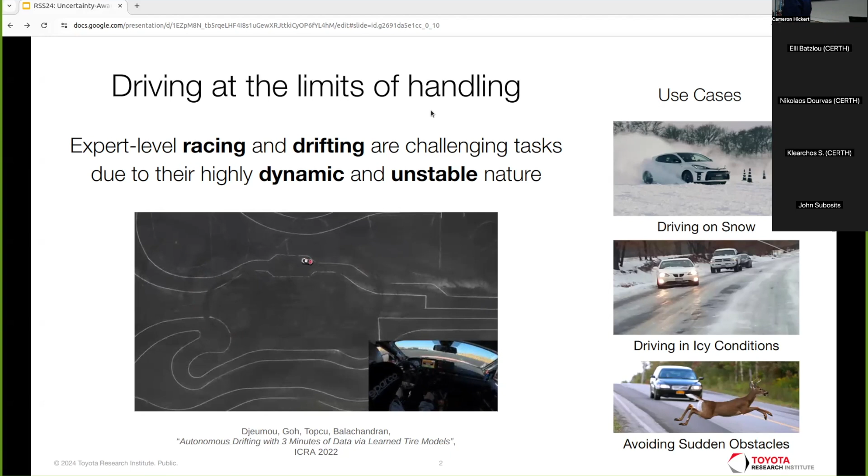All right. Often the way this is done in our group and others is through model predictive control. So in model predictive control, you have a mechanism for predicting how the control inputs you make now and in the future will impact the trajectory of your vehicle. Then, according to your objectives, which you encode as a cost function, you can optimize your inputs across this trajectory to get your desired behavior. So you can race around the track and avoid obstacles, or you can drift with such a framework.

Maybe one note for the latter part of the talk is depending on how you set up your optimization problem and parameterize your objective function, these controllers can actually serve a range of use cases. You can use them for anything from pure trajectory tracking all the way up to trajectory optimization and even motion planning in some settings.

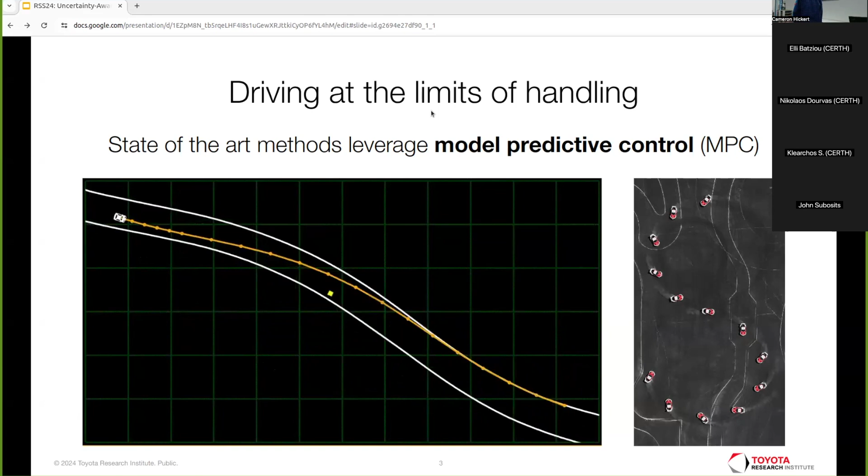And with tuning and refinement, these can actually work quite well. So this is some work that the group did a couple years ago demonstrating autonomous drifting on a racetrack for the first time. This will give you a slightly different perspective on drifting and help you understand where the current state of the art is.

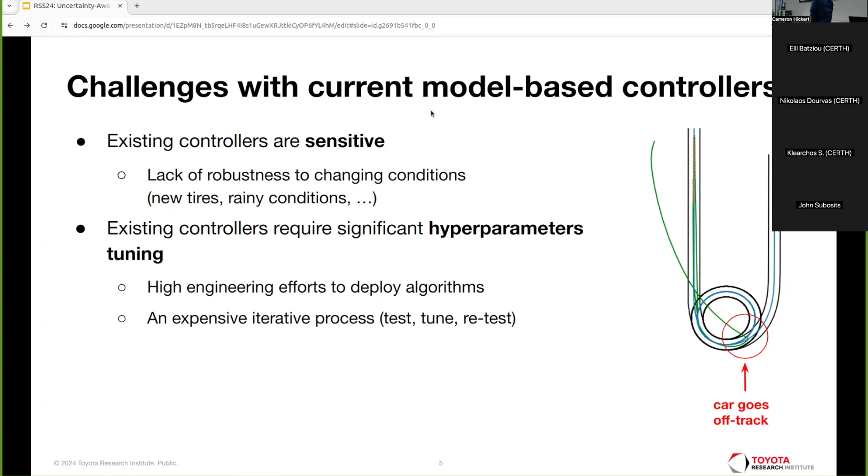All right, so that gave you some idea of what we could do with existing deterministic MPC and vehicle models that are hand-tuned and hand-engineered. So while it's capable of great performance, there are some trade-offs, right? To get these controllers to work reliably, you have to do a number of rounds of testing, tuning, and iteration. This can be a problem when the vehicle's behavior is actually changing. For example, if you're operating on new tires or on a new surface for the first time, you want the controllers you're deploying to be reliable.

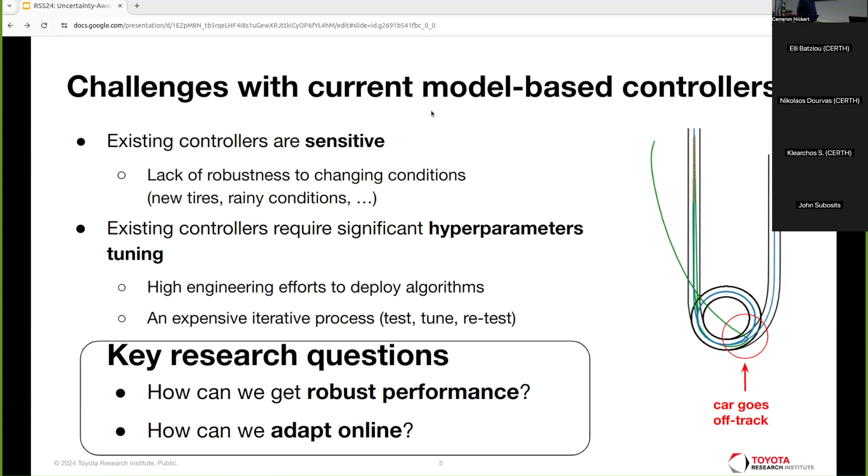So these have motivated the two research questions that we're currently exploring. How we can get controllers that perform robustly so that we can deploy them in novel situations with high confidence, and as we gather more data about a given operating regime, how we can reduce the uncertainty to allow us to continue to optimize the vehicle's performance. That is, extract every bit that it has to give.

All right, so the way we've chosen to pursue this is through stochastic differential equations. For those of you who are unfamiliar, you have a deterministic term exactly as in an ordinary differential equation. So this would be your traditional vehicle or system model and control. But you also have some external disturbances through some sort of stochastic process. These would represent things like bouncing over bumps on the road or other sorts of external disturbances.

However, for our setting, we also have internal model uncertainty. So when we're driving at the limits of friction, something we are sensitive to is how much grip there actually is between the tires and the road. So here we describe that as mu of the tires, and we could model it as, for example, having some normal distribution with a mean of 0.95 being about right for dry asphalt, but that could range down to 0.7 on wet roads or down to 0.3 or 0.2 on snow and ice.

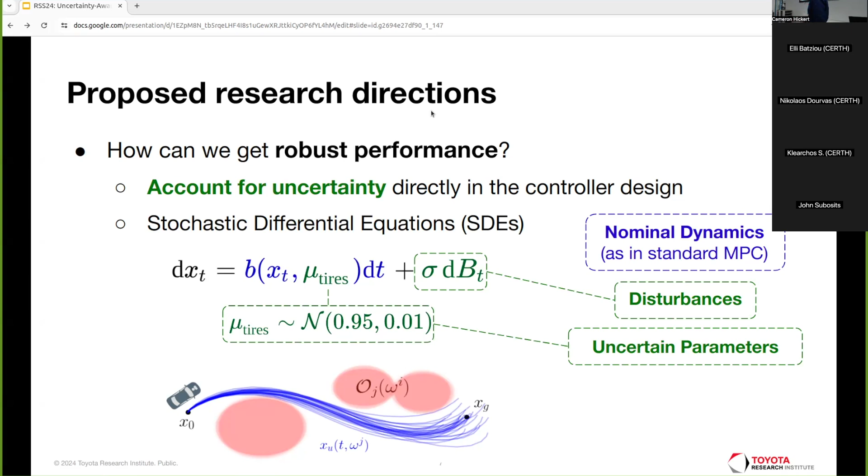All right, so in some sense, what we're trying to do is we're trying to accurately model through stochastic differential equations the possible behavior of our vehicle. And then at the same time, we want to be able to estimate the parameters that describe its behavior.

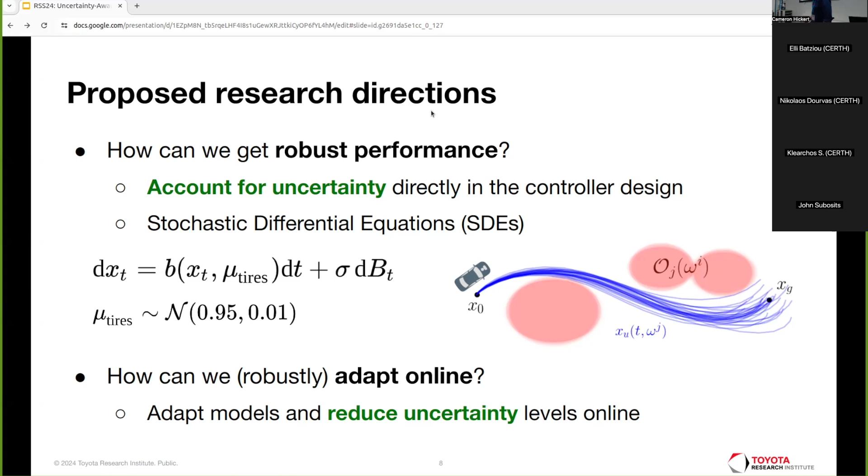All right, so that brings me to the work that I'm going to talk about today. So we're going to have this in kind of two parts, the longer and former of which will be modeling efforts through stochastic differential equations using neural SDEs to capture some of that diffusion noise that we have in SDEs that we don't have in our ODE models. Then we'll look at diffusion models as a mechanism to capture parametric uncertainty of the vehicle model itself.

And finally, we'll end with a look at uncertainty-aware controllers, so how we can go beyond trajectory tracking to actually reason about the appropriate plans you should make given your current level of uncertainty.

So if we're to learn our vehicle dynamics from data, imagine that we want to make good predictions of the vehicle trajectory given a set of control inputs from your current state. So this is effectively the model that we need for model predictive control. Importantly, some things that we might want our model to do are, where there's lots of training data, we want high accuracy, and we would expect there to be relatively low uncertainty in the vehicle's behavior.

So what we've shown here is that where there's not data, we have correspondingly large bands of uncertainty in this qualitative picture. Another important property, though, is that there could be varying uncertainty across the vehicle state space. So, for example, in certain situations, such as driving in a straight line, you would expect there to be very, very little difference in the vehicle's behavior. You expect the behavior to be quite predictable.

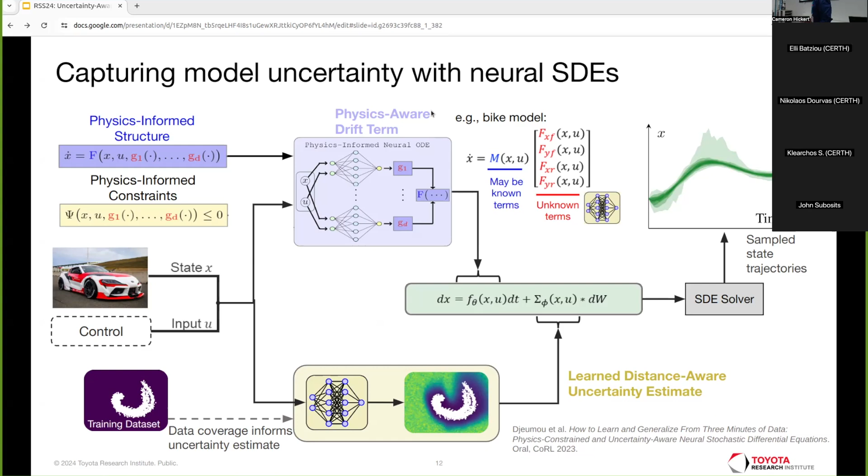Okay, looking more specifically, if we're to look at a simple schematic of a vehicle under control, we have a front axle and a rear axle. These generate a lumped longitudinal and lateral force that we can predict through a tire model, here exponential tanh, which encodes desirable properties in the tire model. This model is then parameterized through a neural network.

All right, so I'm going to dwell briefly on how we use these SDE models for control, particularly for drifting. So our cost function encodes two objectives. One is to track a path. So this is given to us for our current purposes. And we also want to track not just the path, but a desired side slip angle, so how sideways the car is. So this is what makes drifting unique as a maneuvering technique in car control.

All right, so standard MPC framework, we can incorporate box constraints on the controls. Importantly, we are not considering any state constraints at the moment. This is simply a controls problem. Then we can extract a number of samples from our stochastic process that represent our disturbances, and we can then effectively roll out a number of particles given these disturbances, right? So through a Monte Carlo approach, you can characterize the possible spread of trajectories for your current control inputs. Then what you can do is you can optimize in expectation your cost function.

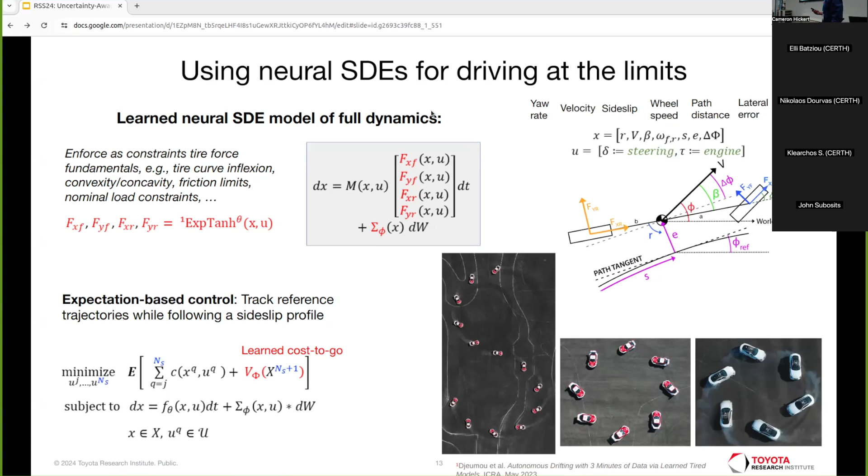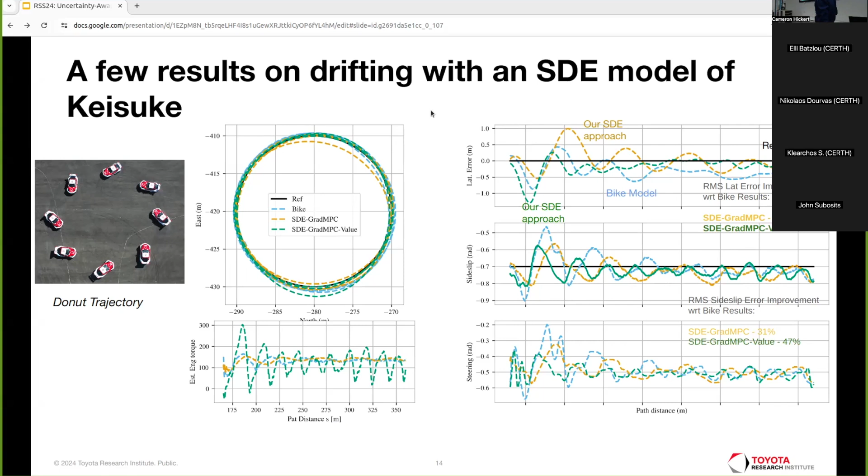All right. So let's look at a few experimental results and compare how this performs against the deterministic MPC we saw at the beginning. On simple donut trajectories with the autonomous Supra, performance improves over the standard deterministic model. We can see reductions in both tracking error, in how close we are to the path, and also how accurately we can track our side slip. So this is an improvement overall.

Similarly, for figure eights, we see kind of a comparable trend, good side slip tracking accuracy, and slight improvement in lateral error. I should emphasize that this is actually the setting in which the baseline MPC has been tuned. So in some sense, both controllers are performing well here, and what's not important so much is the difference.

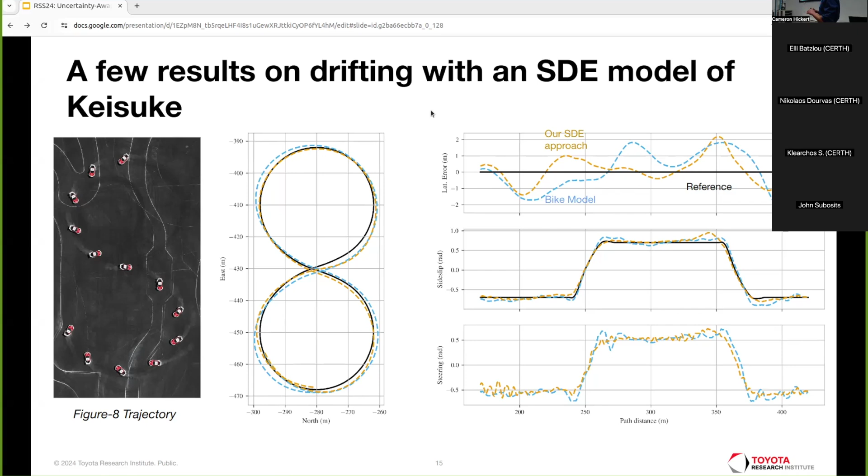I think this holds true even more for this other example on the Lexus LC500 test vehicle you see here. So here we're comparing not against the hand-engineered model, but against the fully connected neural network model of the vehicle's dynamics. So again, in goldenrod here, we see this highly accurate deterministic MPC. So in some sense, this is maybe the most accurate description we can have of the vehicle's dynamics at this current operating point.

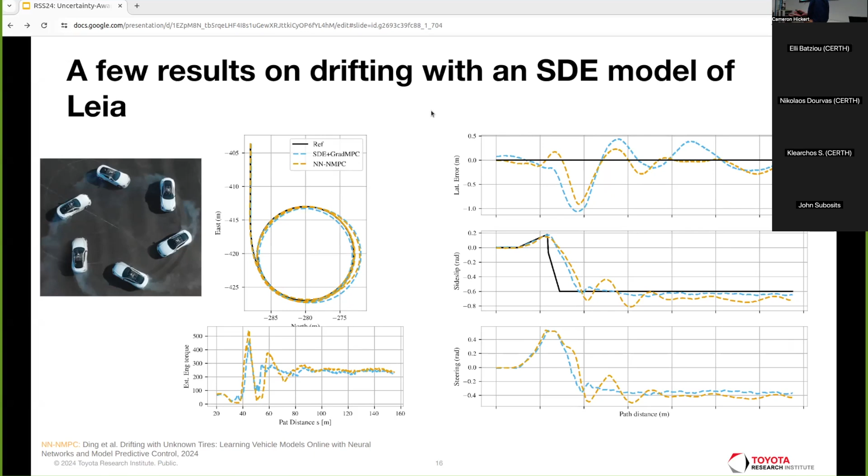Again, the tracking of the SDE model is comparable. Important to note here, though, that this is a different SDE model than what we use to control the Supra. Of course, you have to have training data sets that are unique to that specific car. Which isn't great when the conditions you're operating in could change very substantially, right? You could have roads go from dry to wet. You could have the tires on your autonomous vehicle changed, and you could not have information about this. Or you could have degradation of your vehicle systems itself, and you want to be able to adapt to that.

And so we've started to explore diffusion models as a mechanism to do exactly that. So why look at diffusion models? Well, I think our main motivation is that a lot of existing uncertainty quantification techniques do a good job of fitting single modes in the data and associated bands of uncertainty, but they don't necessarily capture some of the multimodality that we would expect to see in vehicle data. So some examples of this could be different surface conditions like dry roads, wet roads, and snow. But these could also be various models or classes of tires.

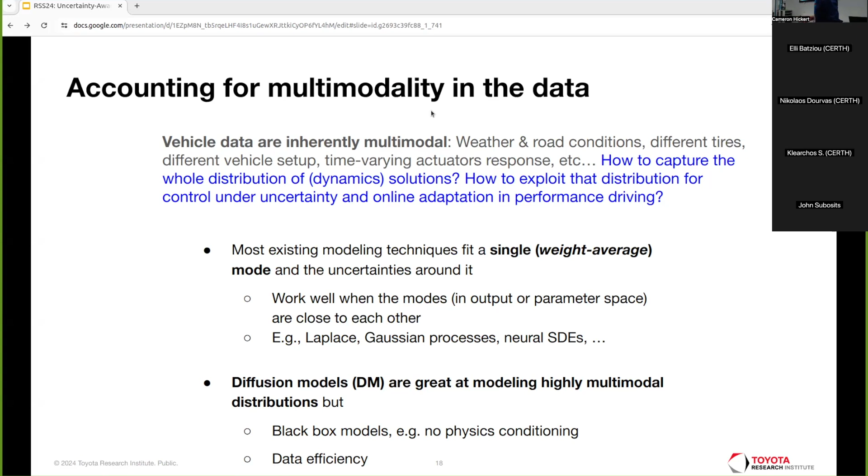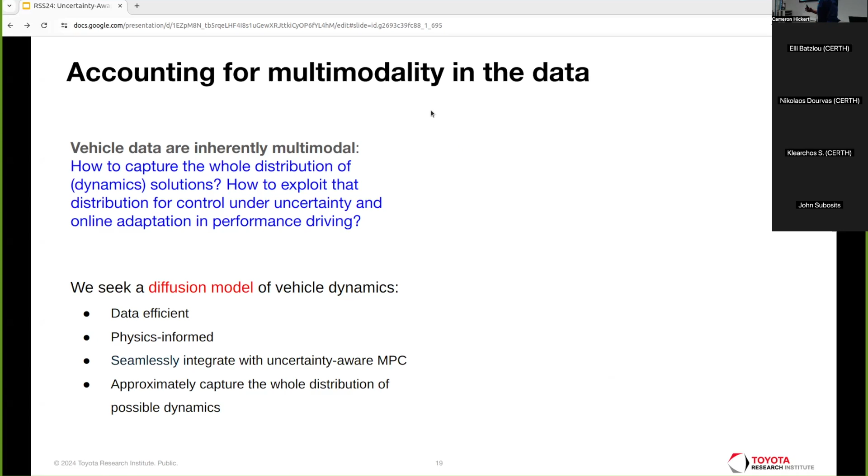However, importantly for our purposes, we want to be able to leverage diffusion models and their capabilities to represent multimodal distributions without giving up some of the same benefits that we had in these physically informed SDE models that we've been using. So the approach we've taken is actually to just combine them in sequence.

So the diffusion model's job is, based on the vehicle's recent state and its evolution, so basically from your observations of how the vehicle is handling, to produce an estimate of the parameters for your vehicle model. And so for a neural SDE, this could be on the order of hundreds of parameters. We can then use this slowly updating model within our very fast MPC loop to do control, with the goal being to have increased confidence in your performance since you're adapting the parameters of your vehicle model online.

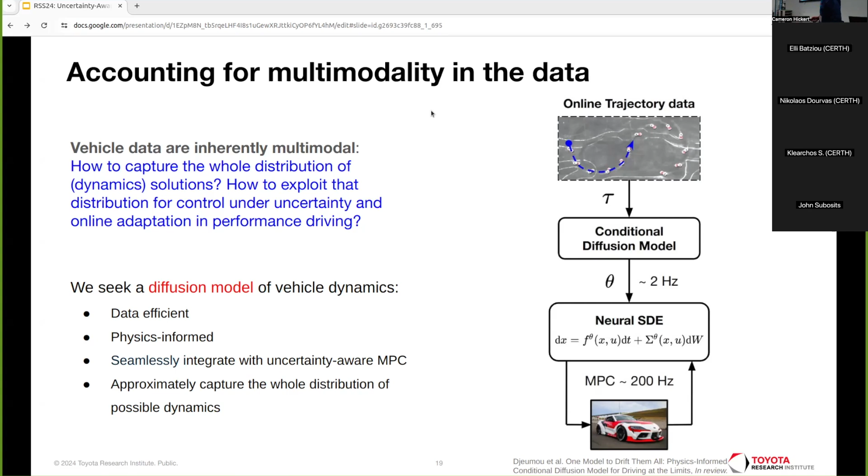Okay, so where does the diffusion model come from? Well, we can train it offline, spend significant time doing that, and then deploy it relatively quickly online. So the algorithm that we're using to do this is to take our existing data set, which characterizes the entire multimodal distribution that you want to model. So this could be data sets from multiple cars, multiple models of tires, surface conditions. Really, in some sense, you want this to be as broad as possible.

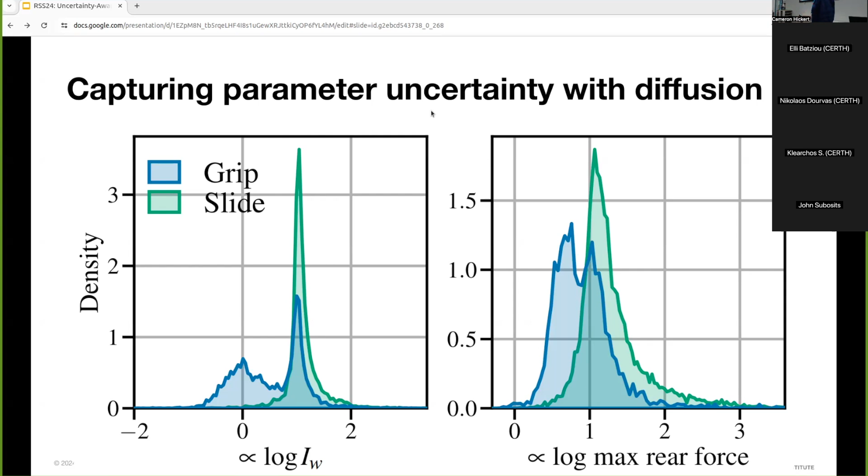All right, so let's see how this works. Previously, we saw that we could use the same modeling technique to control two different cars with bespoke vehicle models for those two vehicles. Here, we ask the question, can we use this diffusion model framework to drift both of our test vehicles? So both the highly modified Supra and the stock LC500. And it turns out that you can.

So that's what we could do in California, but my earlier motivating example was what about conditions like rain or snow? We don't have opportunities to test in those regularly, so we look to our colleagues in Japan who have access to a wet skid pad. So soaked here. What we're testing is the same diffusion model that produced those previous results, but with its training data set augmented with a couple minutes of wet data. So having seen just a little bit of wet data, we can augment the diffusion model to have good performance in wet and dry, hopefully. So will it work?

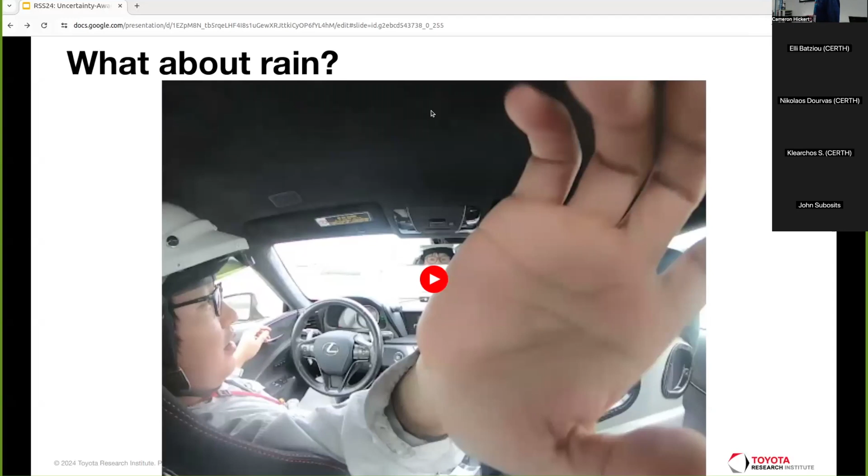The external video is cool, but sometimes you want to see it from inside the car as well. So this is what that same data set looks like from the perspective of the test driver. I also like this video because it kind of gives you a perspective on how small the steering correction you can make to actually balance the vehicle and to keep it sliding in play.

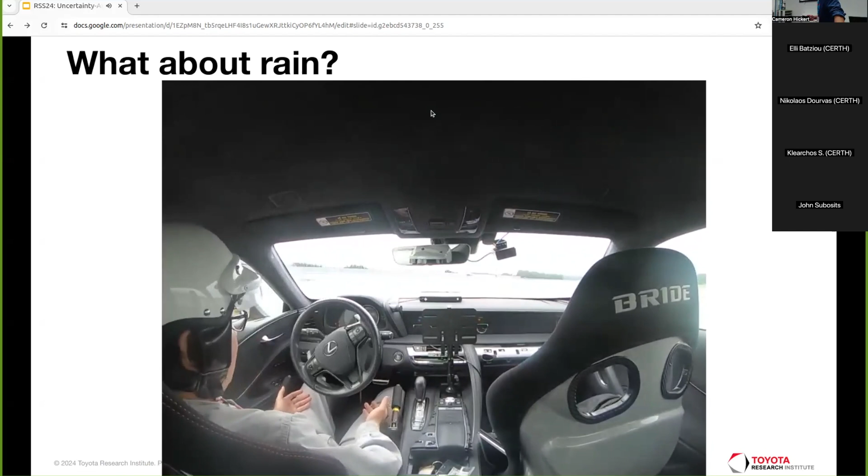Right, so that kind of concludes the focus on our stochastic models and how we've captured both inherent variation across trajectories, but also parametric uncertainty of the vehicle itself. And we've seen that we can actually use a parameter estimation approach based on diffusion models to drift different vehicles across vastly different situations.

In closing, I'd like to talk a little bit about some of our ongoing work in using these models for risk-aware control. So everything you saw to date was the tracking of a target trajectory. Now, the natural question is, who gives you the trajectory, right? And how can you incorporate some of this uncertainty in order to operate with an appropriate level of caution on the road?

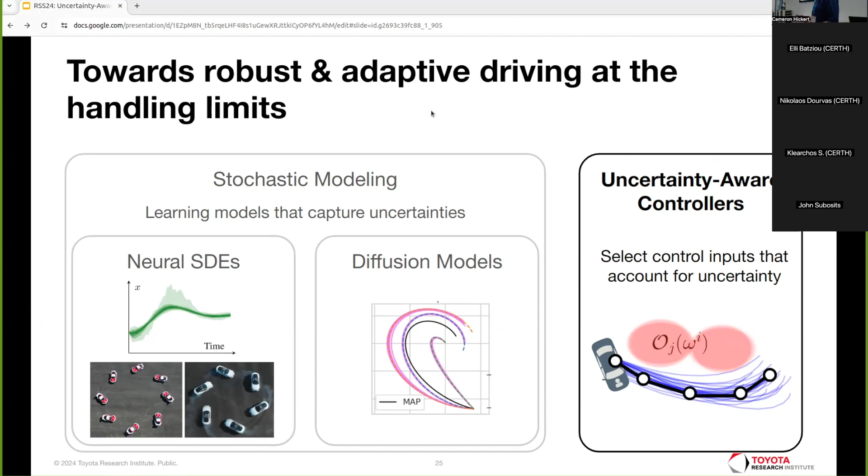So we've been starting to look at an approach done by Thomas Lew and with Marco, actually, when he was back in his PhD, which is based on an average value at risk approach. So to give you a high level, imagine you're planning a trajectory around some obstacles. This could be an emergency obstacle avoidance maneuver, for example.

Based on your SDE, you would have some variation in the vehicle's response, and you would have some trajectories that violate your constraints, right? So you would represent your constraints, say non-collision, as some function g, which we want to be less than 0 for safety. Then you would say, with no more than 5% probability as an example, the value of g should be more than 0. So this means you'll be safe in at least 95% of the cases.

Then what Thomas has done is introduce this average value at risk notion, which is actually the average value of the elements g in this tail here. Importantly, the average value at risk is always greater than this value. So if this is less than 0, then this definitely is. So it's slightly conservative, and it's easier to work with mathematically.

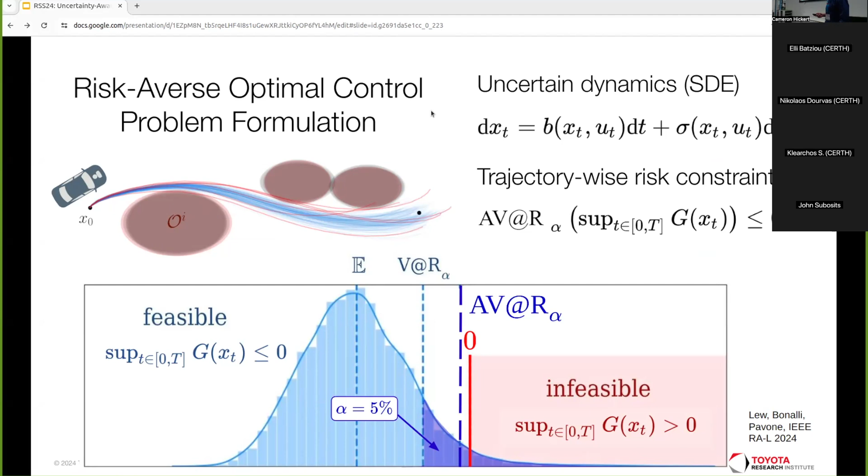The question then becomes, how do you solve this? And while there's various approaches in the literature, most of them leverage simplifying assumptions that make them less than ideal for our question of driving at the limits, where we're dealing with highly nonlinear dynamics, potentially some state uncertainty from perception, as well as these twin uncertainties in parameters and external disturbances that I described earlier.

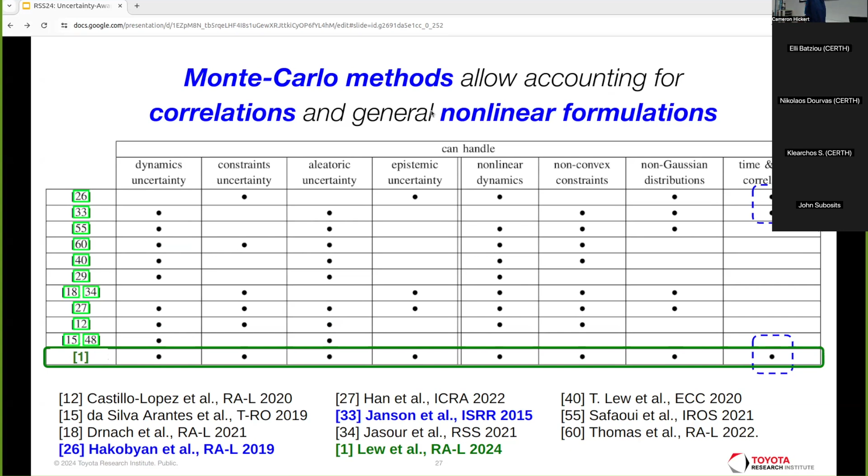So the approach we're using is to tackle this through, again, a Monte Carlo method, much like we saw in the relatively unconstrained control case earlier. Again, what we want to do is enforce this average value at risk constraint over a sampled set of M trajectories. And this can be solved relatively efficiently with nonlinear programming. As nice theoretical guarantees, as you increase the number of samples, your answer can be proven to converge to the exact solution.

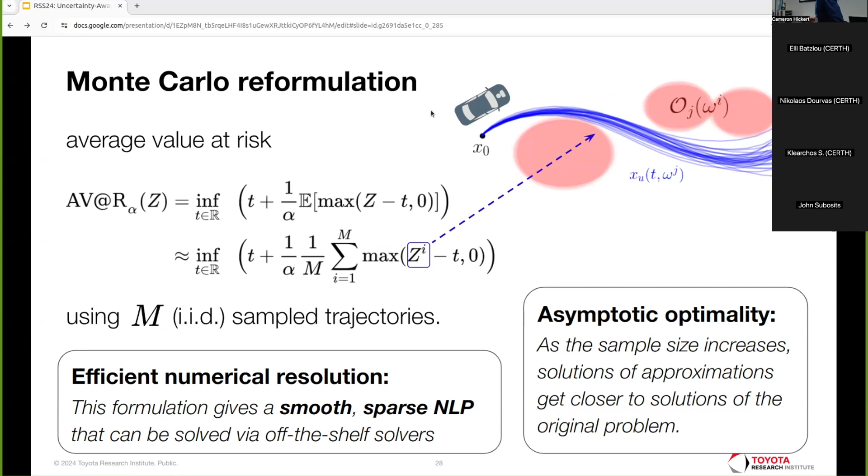So what does this mean for drifting? Our simulation results suggest that potentially we can improve performance even more, particularly when we're operating in scenarios where we have hard constraints or things that we really don't want to hit. So here in this kind of pale red, you would see no-go zones, regions we absolutely need to stay out of. A baseline deterministic MPC can track its nominal trajectory perfectly while staying outside the zones when it matches the model exactly. In contrast, this average value at risk formulation has to cheat the vehicle's trajectory away from these obstacles. So you actually have to pay a higher penalty in your path tracking performance.

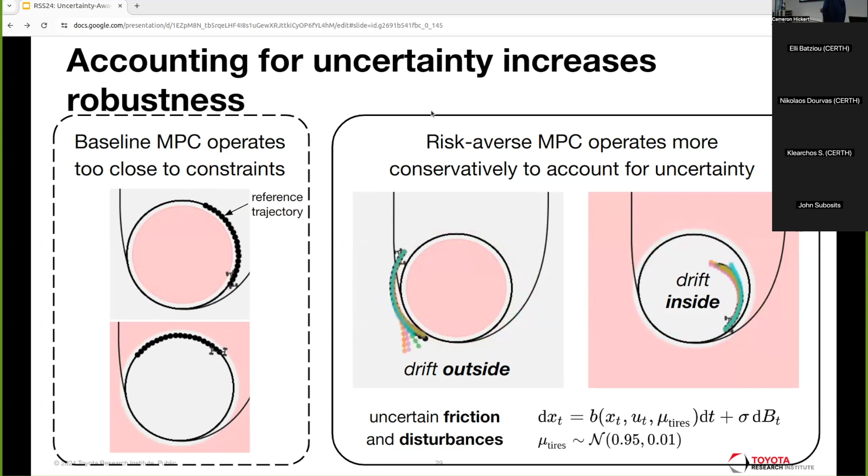However, when there's a difference between the model used for simulation and for control, the picture looks very different. So with a relatively modest reduction between friction used in the model and within simulation, you see either constraint violations or spinouts. And I will point out that this is a much smaller reduction than we saw between dry roads and wet roads, for example, in the preceding examples. In contrast, the risk-averse MPC is able to stabilize the car and to keep it away from the obstacle. So this is, in some sense, exactly what we were hoping for. We give away some peak performance in exchange for increased robustness when we're uncertain.

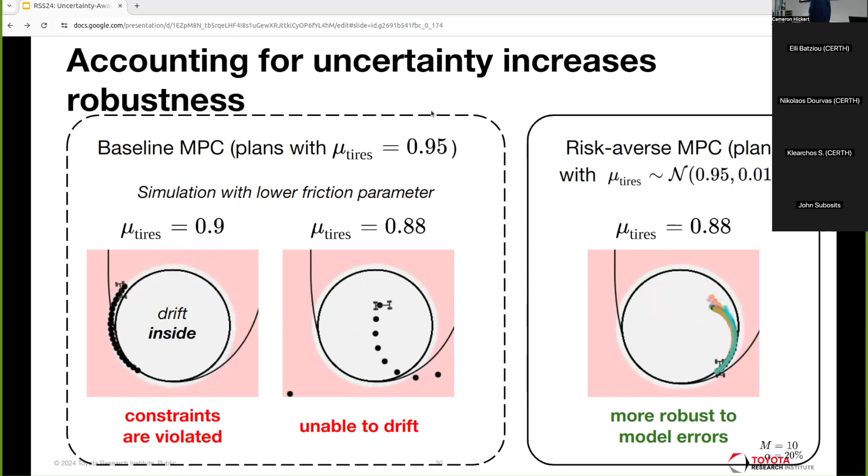Right. So where to from here? Well, while we can solve these things relatively efficiently, we want to get it to the point where we could potentially use this as a real-time MPC on the car. And so some of the work that the group is doing is looking at GPU parallelization to keep the compute time from growing linearly with the number of samples, as well as looking at other methods like importance sampling to make sure that we use no more than the number of samples that we need.

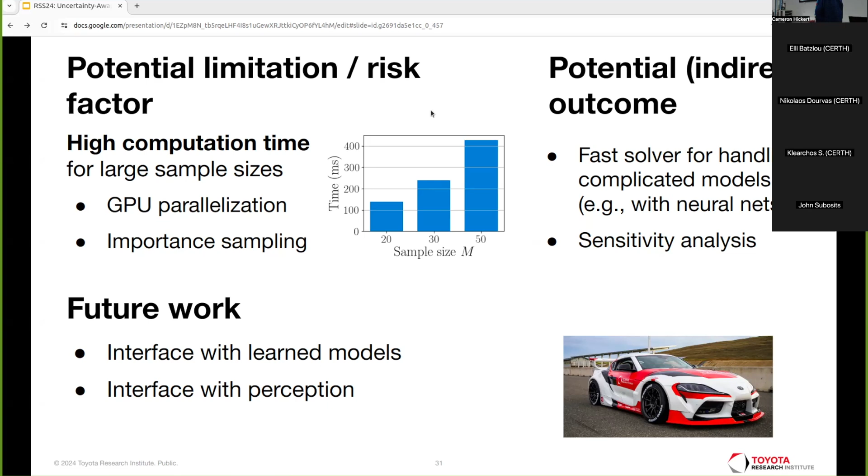Okay. So to conclude, hopefully you've enjoyed learning a little bit about our modeling approaches for both internal dynamic parametric uncertainty, as well as the modeling of external disturbances, and how we've used these controllers both in real-time control on the vehicle across various situations, and how we're looking at using them in planning for safe operation, even up to the vehicle's performance limits. With that, I'll take any questions.